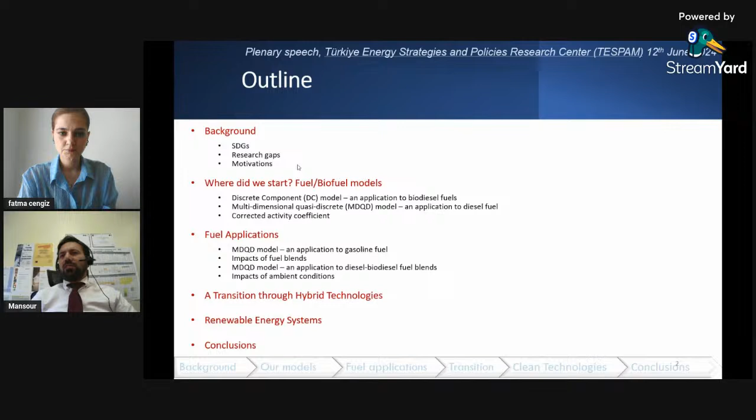To start, as we all know, there are 17 SDGs proposed by the UN, and everyone in the world needs to shift towards that, sooner or later. This is a critical matter, demanding and affecting all researchers, industrialists, and academics equally. The relevance of this talk will be to SDGs 4, 6, 7, 9, 11, and 13. I won't recall them all, but they are highlighted in this slide.

More relevance will be to SDG 7, which talks about affordable and clean energy. This was summarized by the Assembly in 2015, that energy needs to be affordable, reliable, and sustainable for all humans on the globe. To understand what it means, we can look at two important factors that can improve our energy efficiency: the sources of renewable energy in general - are these sources depleting, are they clean, are they sustainable - and storage, meaning how this energy can be stored. These are the two important questions to answer.

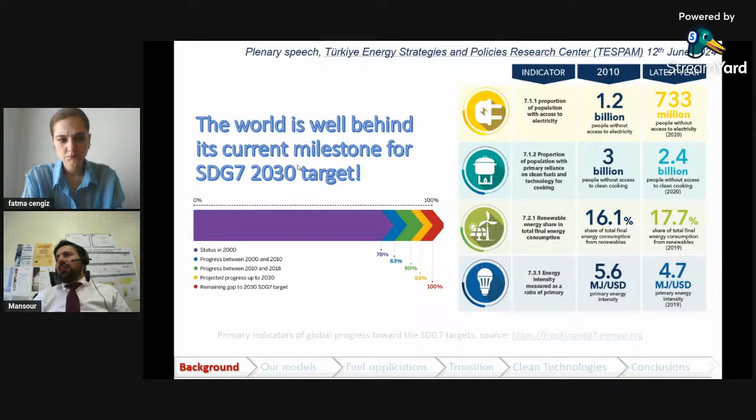There are many reasons behind it, such as where the world was in 2000, how it moved, how that evolved, and where we stand now. Up to last year or a couple of years ago, the figures show we are still well behind. Many countries in the world are trying to move towards the SDG regulations and guidance, but as we can see from the figures, we are nowhere near the targets, and we need to speed up the work.

To talk about that, I need to start from my story, where I started. I began working in the area of thermofluids in 2007 at Sussex University's Thermofluids Mechanics Research Center, which is a Rolls-Royce University Technology Center. After that, I moved to Sir Harry Ricardo Lab at the University of Brighton in 2012, in the southern part of the UK, and collaborated with the Ricardo company at that time. Ever since, my research has kept evolving in this area.

The motivation was that at that time there were calls from environmentalists, government bodies, and industrialists for a replacement of fuel with bioenergy. There are many reasons behind it - economic reasons, environmental reasons, policy makers behind it. So there are a variety of factors.

For example, the UK Department for Transport was contacting our research center at that time, asking us to feed research into this area as well. So it was a critical matter.

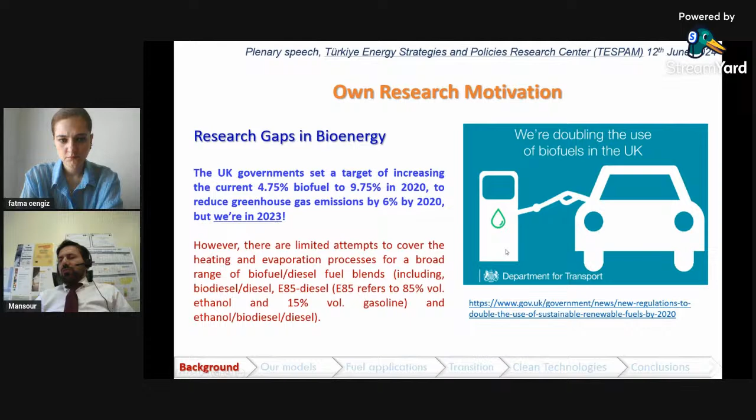When I started working in this area, we found many gaps in research. Because I was working on the computational development part, I found that CFD software tools did not take into account the full physics and chemistry underlying the processes preceding the onset of combustion. For example, temperature gradients inside droplets were not taken into account, and species diffusion - meaning every single component in the fuel - was not taken into account when they degrade at the surface of the droplet and inside the droplet.

Many of you will question why this is important. I can show you the results of that later in this presentation, as well as the recirculation - the first thinking about this started in 1989, considering recirculation in droplets and how important that is on many aspects of combustion, as well as non-combustion processes that have atomization and sprays in them.

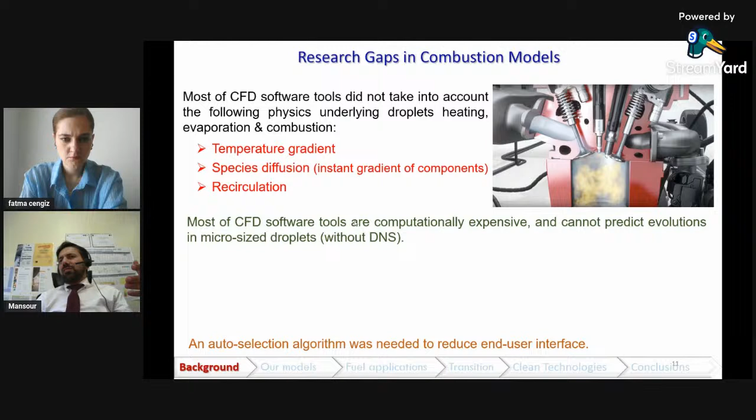And adding to that, CFD software tools at that time, about 16 years ago, were computationally expensive. It wasn't easy to deal with complex methods, and especially if we want to do DNS, direct numerical simulation, it becomes even more complicated and more timely work, which is computationally expensive work to do.

And when we looked through literature, there weren't sufficient attempts to look into that. There were many fuel surrogates, which are either research surrogates, such as research octane number, or there were some experimental attempts, and they didn't take into account the underlying physics. So they can be applicable in certain scenarios, and when you extend the range of application or the real full cycle simulation of the engine, then these surrogates fail to meet the demand.

As a result, at that time, we came out with the idea of the multidimensional quasi-discrete model, and that was based on a model proposed by Professor Sazhin in 2006. He's a leading mathematician. He was at Sheffield University and moved to Brighton at that time, and he proposed the discrete component model.

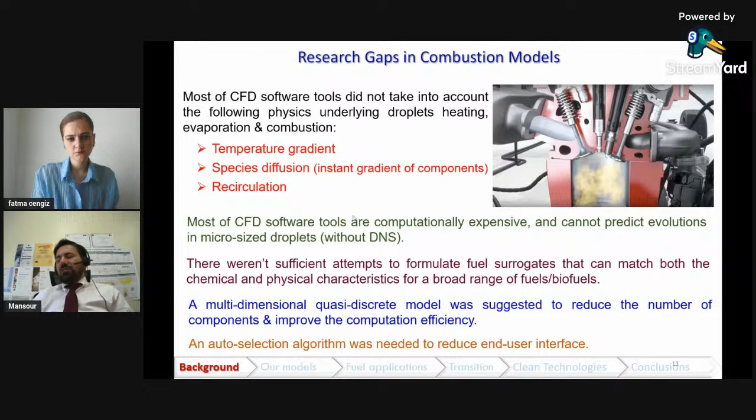And my area was to shift into the multidimensional quasi-discrete model, which means instead of taking one group of components into account, we take many groups, because if we look at diesel, for instance, it has not only alkanes, it has bicycloalkanes, it has tetralines, and many other groups of components. And taking into account these groups of components will make the software tool even more expensive and more timely to run. As a result, we needed to replace them with an auto selection algorithm to select the components that can be represented for the fuel.

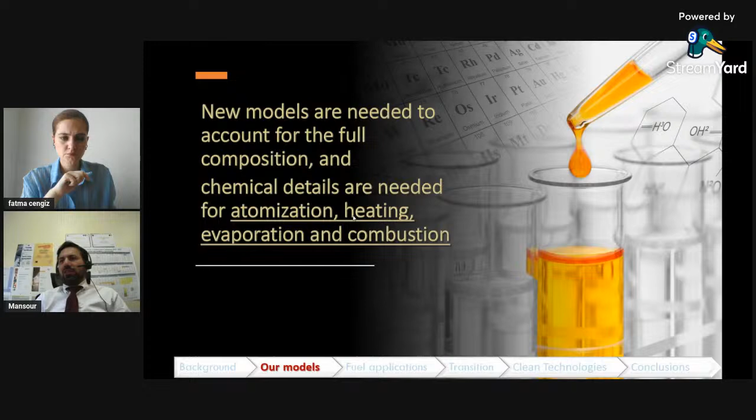As a result, the conclusion was that new models were needed to account for the full composition and to take into account the chemical details for the atomization, heating, evaporation, and combustion. So each part of these processes is quite detailed, and to talk about it in one presentation is unfair. So we will talk at the top surface level of it without mentioning the mathematical modeling behind it. But to refer to where it comes from, I will share some screenshots of the publications in literature that our audience can refer to for further information and enhanced knowledge about the topic.

So starting with the discrete component model. In this, the heat transfer and diffusion of species inside the droplets and monodispersed droplets and the atomization of sprays are all taken into account, as well as not only the thermal conductivity but the effective thermal conductivity and effective diffusivity. And effective means it's not only based on the temperature gradient, but it's based on the diffusion. Because what happens basically, within nanoseconds, not only microseconds, the volatile components, as chemical engineers know, evaporate much quicker than the heavier components.

And within nanoseconds, you find suddenly the fuel composition is different. As a result, the properties of these fuel droplets are completely different. And when the properties are different, the combustion characteristics become completely different. So all of these underlying physics were not fully taken into account in the past. And as a result, this model was very important, and it was crucial for moving forward in the understanding of the combustion model. And luckily, most of these codes that we developed at that time were embedded in many commercial CFD software tools such as ANSYS Fluent. So if you go to ANSYS Fluent, you will find the monodispersed and multi-component droplets function there already embedded.

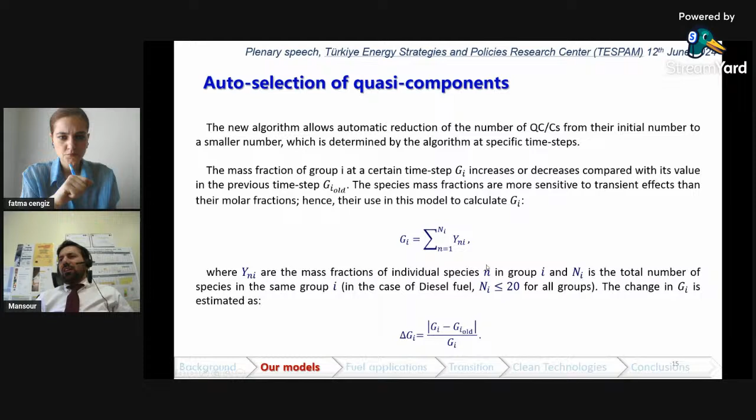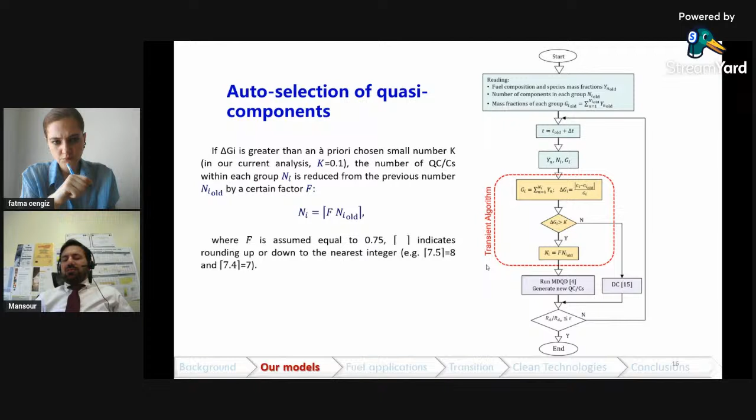As a result, all of these fractions of components are ensured or verified to make sure they meet the requirement. And as a result, the total number of fractions should always be normalized and equal to the total number of components without losing the impact of any of them. And this shows how the auto selection of these components is made to make it easy for the end users to be able to use the code.

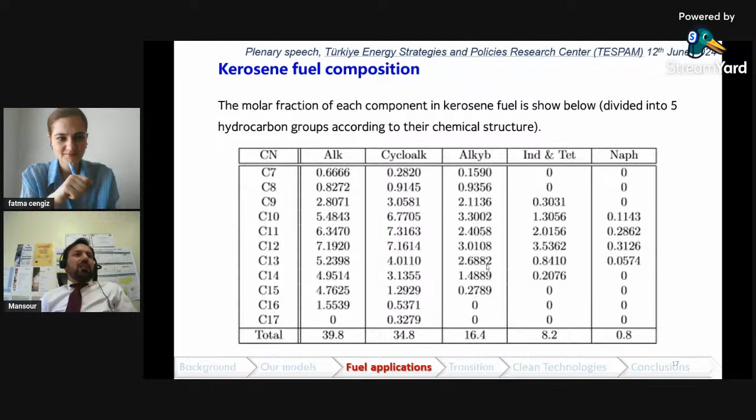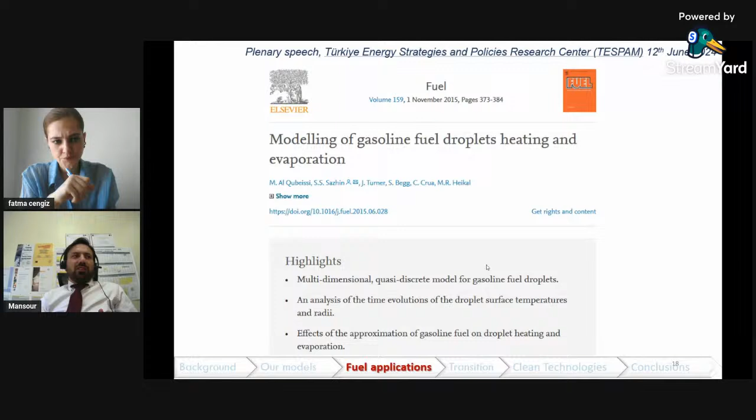So moving forward with that, because talking about all these topics makes the audience bored, we need to talk about more fruitful results on how this can shift further into more applications. So we applied that to gasoline fuel engines, for example, and tried to see the impact of it, and then moved to real diesel engines and tried to understand how the diesel components are taken into account.

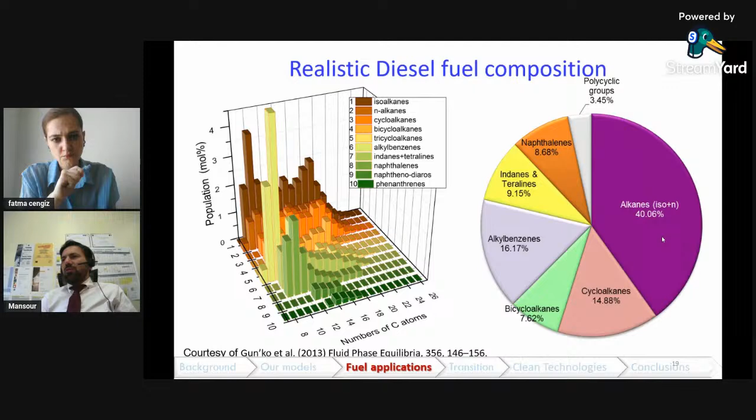Most researchers before that time were assuming that diesels are alkanes. Even in many cases, industrialists were thinking that we could replace diesel with N-heptane or N-dodecane. And that's the impression I had when I started, especially working with Ricardo, which is one of the top testing engine providers. This is the impression the industrialists had at that time. So moving in this direction means bringing a lot of benefits to industry to have a better understanding of how the combustion is taking place.

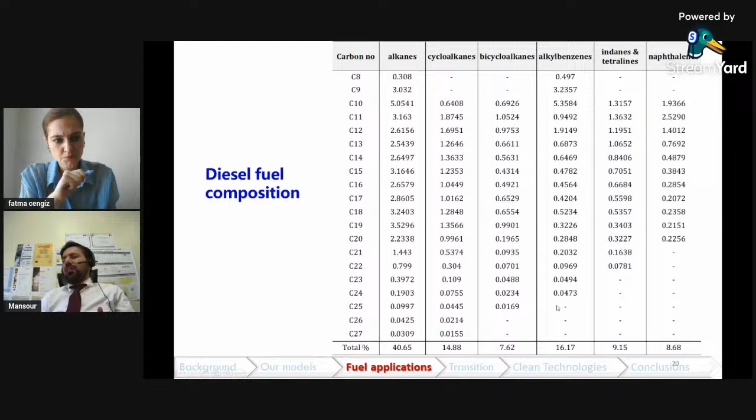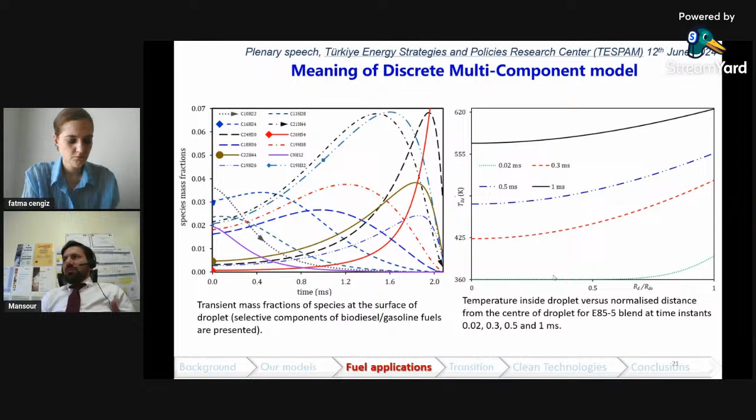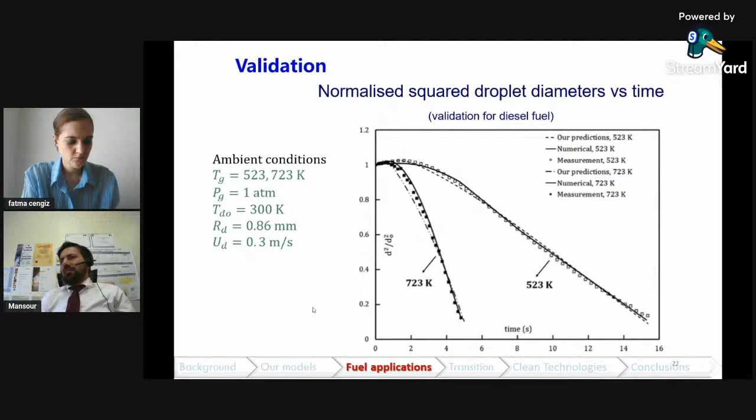In the past, droplets used to be treated as a lumped system because they are extremely small particles. So many scientists used to assume that droplets should be one temperature. There is no point in taking into account the difference in temperature between the center and the surface. But when we looked into it using this model, we realized that there is a big difference, and that could also be due to the differences in species, which affect the thermal conductivity of the droplet. And because the thermal conductivity differs from one layer to another inside the droplet, you could see that it has a significant impact on how the thermodynamic and transport properties behave inside the droplet and at the surface of the droplet at that time. Okay, this model was validated against experimental data at that time for certain input parameters.

And moving forward, we had to formulate surrogates that can be useful for industrialists. And these surrogates need to be realistic, because when we dealt with the quasi components, as I said, these molecular formulas were hypothetical, not realistic. If you show this to any chemist, they will not understand the meaning of these numbers, because as a CFD modeler, to me this makes sense because I look at it from a mathematical point of view. But to chemical engineers, this doesn't mean anything, because these chemical formulas don't exist in real life.

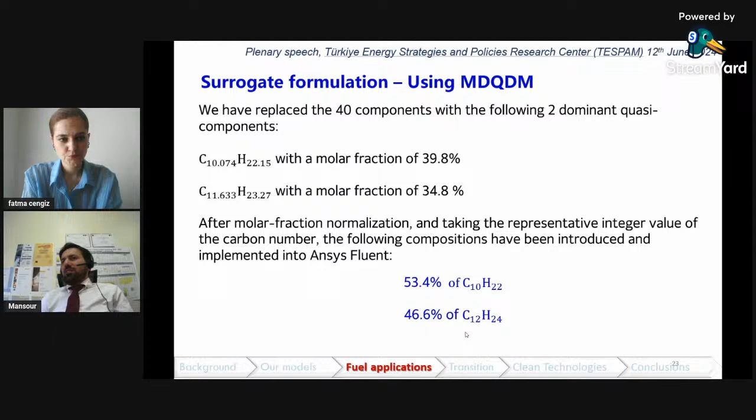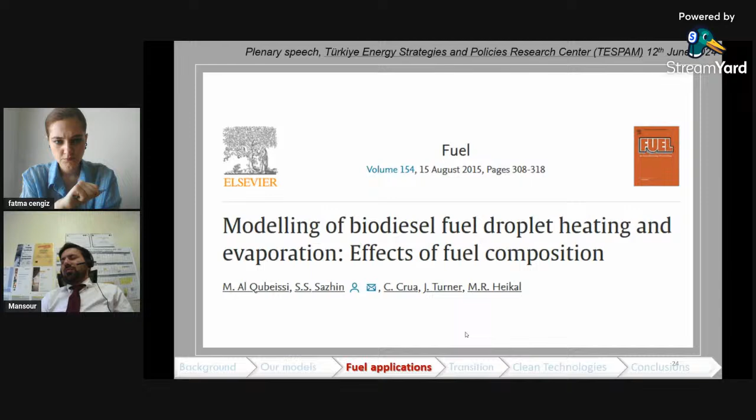So after making sure this is applicable and solvable, we need to make sure they are representative to chemists or chemical engineers, to make sure that this can be used in real life scenarios. And when we talk about fuel surrogates, we need to show the industrialists what type of components can represent these fuels in all scenarios, or the nearest approximation. As a result, we moved forward in application to biodiesel fuel, taking into account all these effects of composition, and this was published.

Then, after dealing with all of that, there was a time to move away from these detailed compositions to something more realistic, which is starting with application to aero engines as well as reciprocating engines. So we started with applying to industrial gas turbine engines, for example, and how that can be realized to make sure the models work.

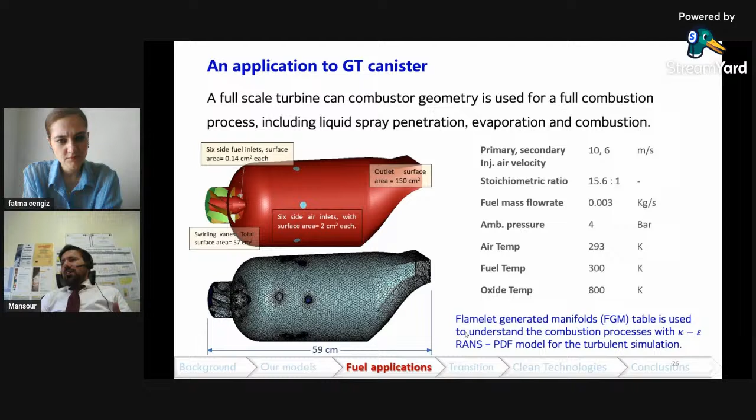And as a result, we started moving into the application to these types of engines and tried to validate that, and also looked at how ANSYS could be improved. ANSYS Fluent, I'm talking about, to take into account all the models, how much we could improve the model. And we could see that at that time, ANSYS didn't have this as a package. Now it has it as a function.

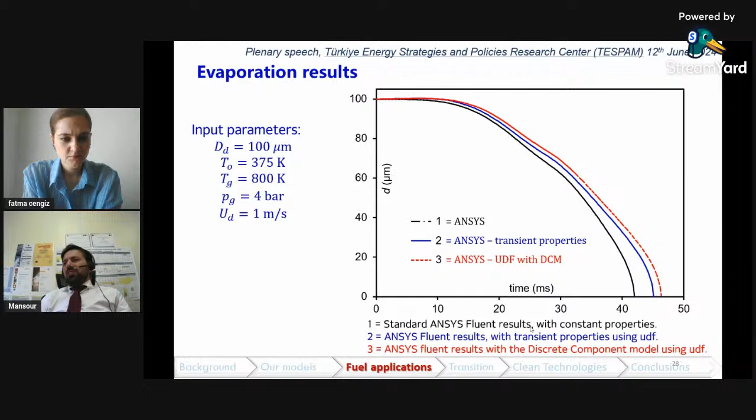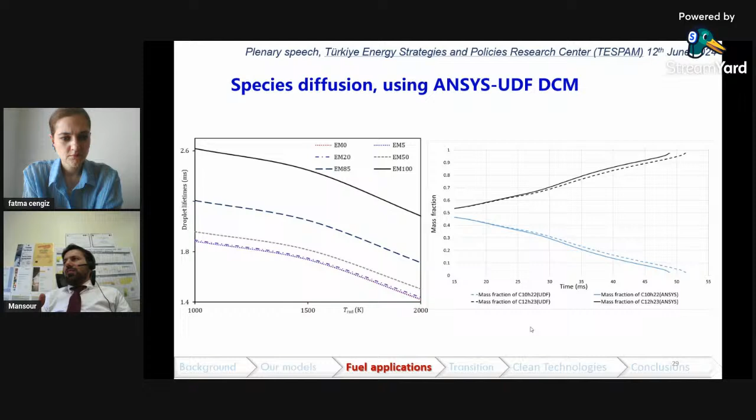We used to use user-defined functions to improve the software and see how far or how close we are to real industrial applications and to experimental validation. And did the same thing by looking into diffusion of species and looking into droplet lifetimes as well, to see how using these models can be impacting the droplet lifetimes, which are the processes preceding the onset of combustion, as well as combustion itself.

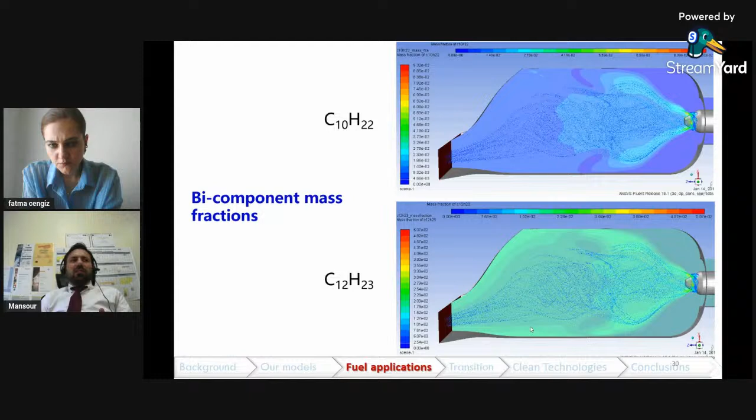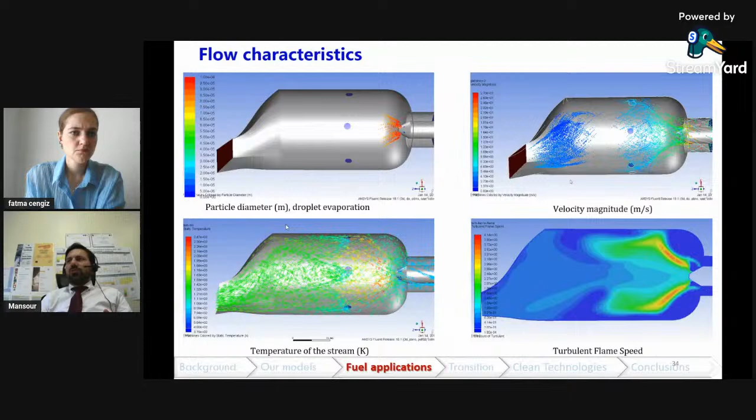So these were the applications and the results that we had. This is a typical example of the results, not everything, of course. And that's how the engine behaved due to using the new model, looking at different sections of the engine to see the distribution of other species such as the emissions, NOx mass fractions, CO2 mass fractions, and O2 mass fractions inside the engine, whether they're homogeneous or not, and compare them to real life scenarios as well, and so on. So that was all carried on research.

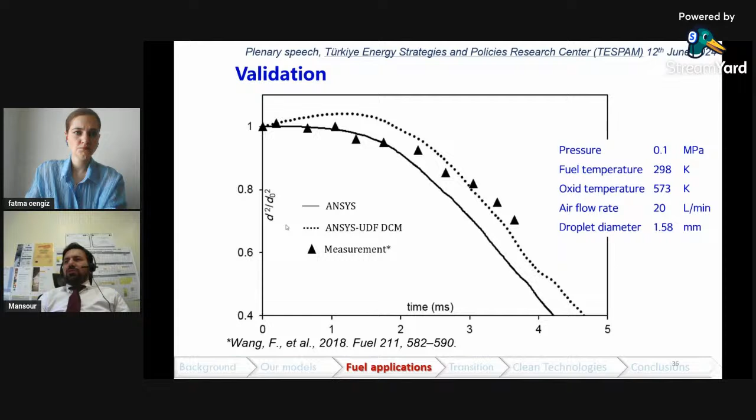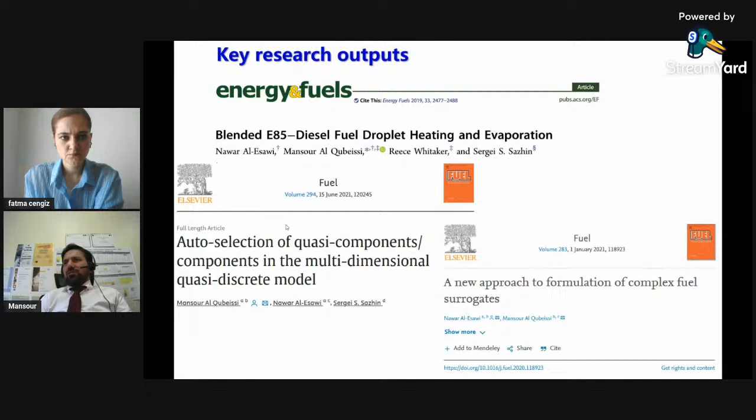And it was also published in one of our papers, joint with researchers from Turkey at that time. And we moved forward into, as well as improving ANSYS, further improving our model to make sure it works properly and it's more precise. And we published further work on the developed model in application to a wider range of combustion systems. All of these were published, a variety of approaches were used, and all shared with the interested readers in a variety of journal articles.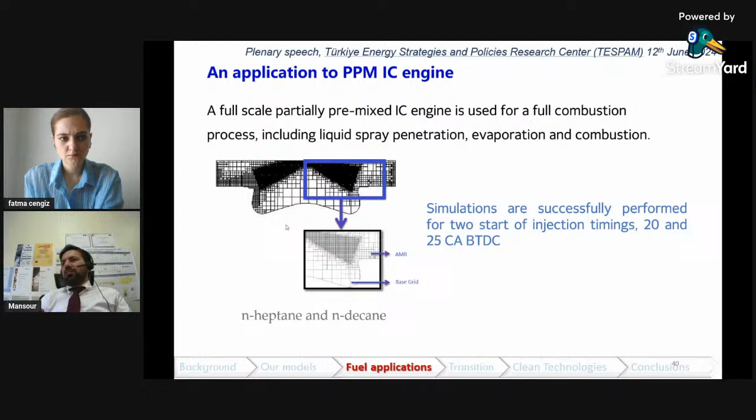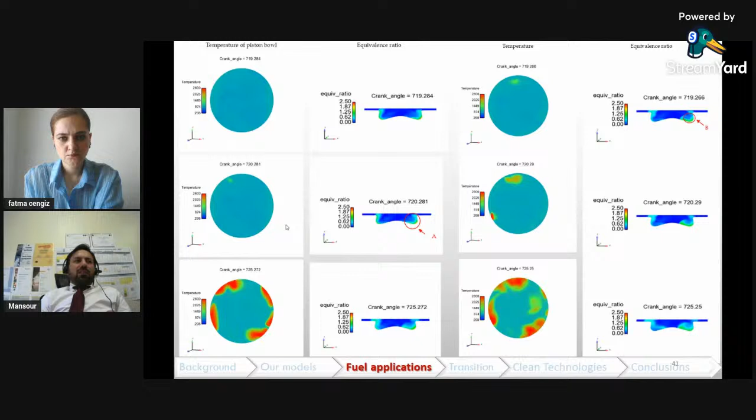And we moved into the improvement of the engine itself, how to improve the pre-mixing process, for example, to make sure the tuning of the engine represents a better quality combustion. So this was a good move, which was enhancing the industry as well as making sure our model is applicable to industry. So all of these applications were strong proofs and evidence that our models are of significant contribution to industry and research at that time.

With all these validations and approximations, as well as improvement to CFD modelers, because here the computational time has been significantly improved, but without a sacrifice of the accuracy of the model. So as we improve the CPU efficiency, we could see that there will be higher errors, exposing the model to higher errors, while here, taking into account the full composition of species is zero error, which is 100% realistic.

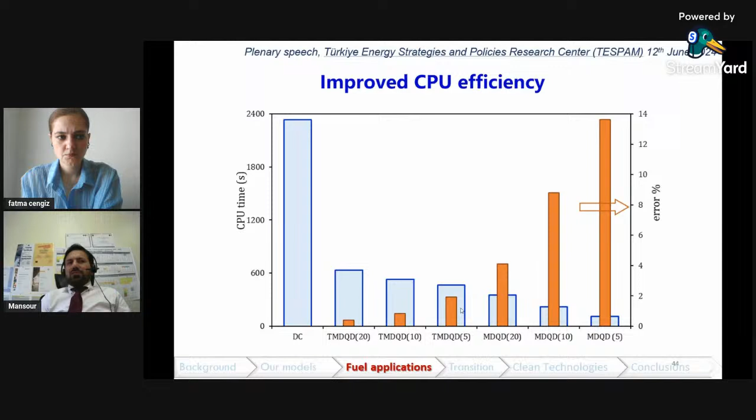As we move forward to reduce the computational time, we of course expose the model to some errors, and we could compromise somewhere in the middle to make sure we have a highly efficient approach without sacrificing the accuracy of these models. All of these were published in one of my papers to summarize how these models evolved and how they were improved, and the improvement or tuning of the engine was also jointly published with many colleagues who work in this area.

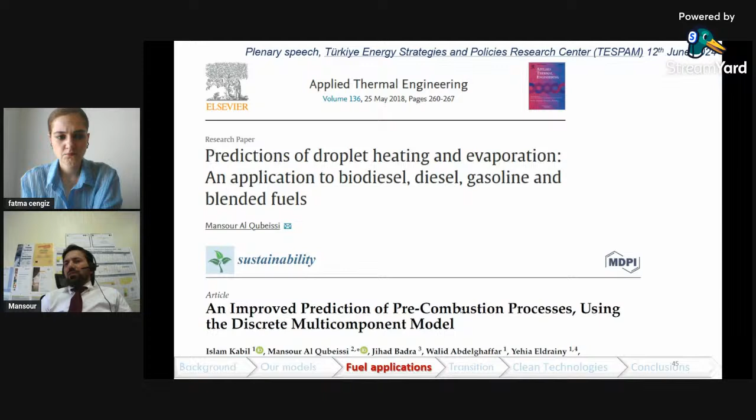I also summarized all of these findings in one of my books in the past about the heating and evaporation of multi-component droplets in application to combustion systems, and how we apply, for example, the variety of biofuels, and what are the challenges and opportunities in this area. And we had a special issue at that time as well, open for researchers to share their findings so we can move forward into a new generation of modeling approaches, a new generation of industrial findings and challenges.

And then at that time, we were told funding resources dried up in the combustion area, and we need to move away in order to attract funding. And they were right, because the classical approach of combustion was to use fossil fuels. And the Western world is struggling with accessing fossil fuels, and the rest of the world will also struggle at some point, sooner or later, because we are getting closer to the depletion of these fuels. So we need to think of alternatives. And these alternatives, as mentioned in the past, need to be sustainable, affordable, clean.

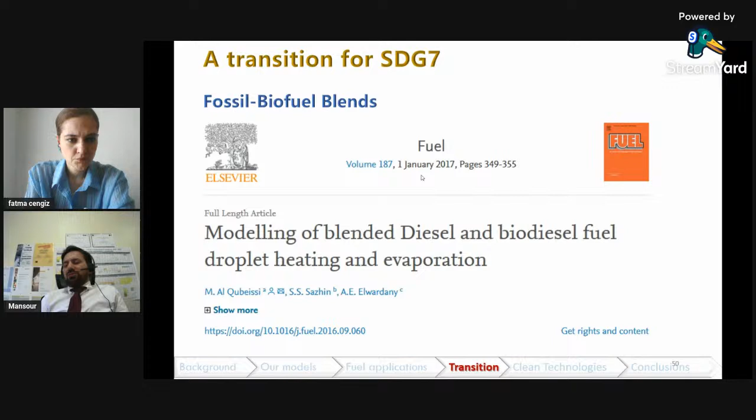Then we had more motivation to move into that direction, which is thinking about the impact of biodiesel on flex fuel. And flex fuel is a fuel that you mix ethanol into diesel or ethanol into gasoline. So ethanol is thought of as a bio replacement of gasoline, and when we have that mixture, you have a problem with the polarity of the fuel.

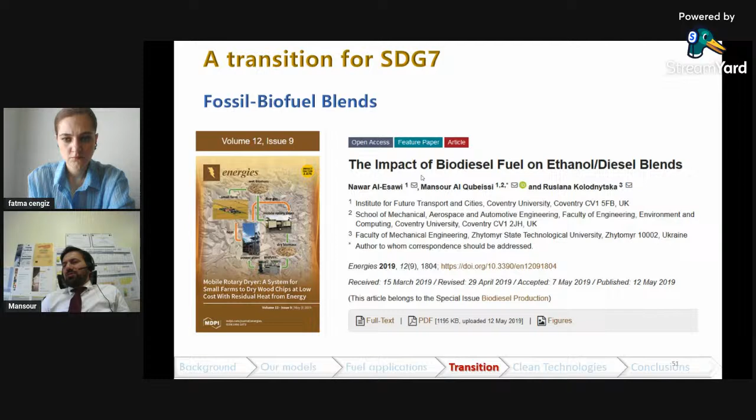So we needed an intermediate solution, and we tried, with another renewable source of fuel, which is biodiesel, to see how this has an impact on it.

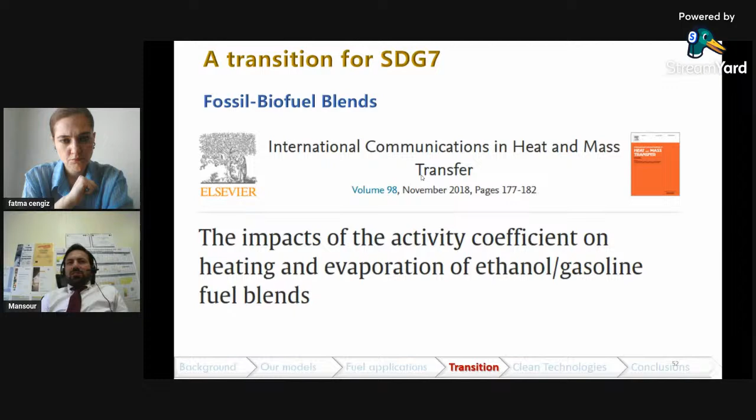So at that point, we started thinking more seriously about transition to SDG 7, and we thought about other details in the model that can make improvement to this mixture, such as the activity coefficient. And as a result, although these thermodynamic properties might not be thought of seriously, they have serious impacts on how these fuels behave and how we can resolve this matter. So all of this was shared with the public through our research articles and publications.

And after that, we need to cope with the game-changing proposals, especially by politicians and many academics and media, that electric vehicles are coming and people are shifting towards that. So are we really ready to move to electrified, or what they claim to be clean technologies? Are they really clean?

My opinion is not important here, because there could be many conflicting or contradictory opinions regarding this matter, especially for me coming from what is described as the dirty combustion area. They're using fossil fuel, moving to electric. Maybe there is rejection by the combustion society to think about this as a good approach.

So what we need is to have a clear transition in between. So maybe thinking about hybrid electric vehicles as one way in the transition. As a result, we started thinking of how we can use existing technologies in improving emerging technologies such as electrified vehicles.

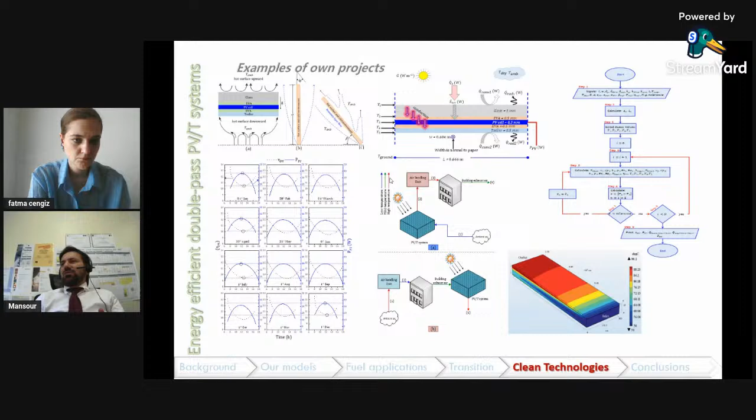Now moving into a wider range of battery thermal management using a variety of types of fuels, and also applications to a variety of renewable and sustainable energy systems, moving into the details of how batteries work and whether they can be used in other types of applications or energy resources within the grid, and moving into even wider applications beyond conventional energy systems, such as vortex tube generators, and hydro-powered systems to generate energy or extract energy from moving water, which is hydro pumped.

An example of this shown here is the hydro-powered Bunyip pump. The Bunyip is a multi-stage pump that uses two sides: one side to make a reciprocating movement, and the other side to deliver water.

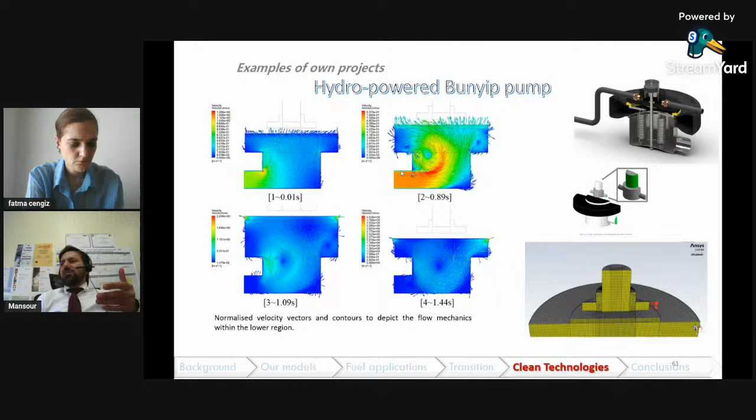This was successful in one of our GCRF projects when we applied it in rural areas in the region of conflict between Pakistan and India, in Kashmir. We applied this type of system to solve a problem where there's no access to electricity, no access to fuel at all.

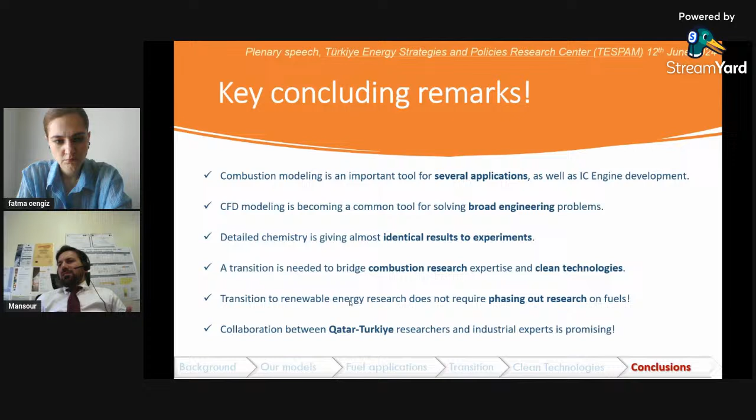As a result, this talk is a call for joint collaborations between researchers from different disciplines, to feed our knowledge together into useful impacts in the future. Examples of collaboration with many researchers, especially from Turkey, have in the past been very successful and promising.

As a result, I would like to conclude my talk at this point, and thank you all for your attention. Thank you.

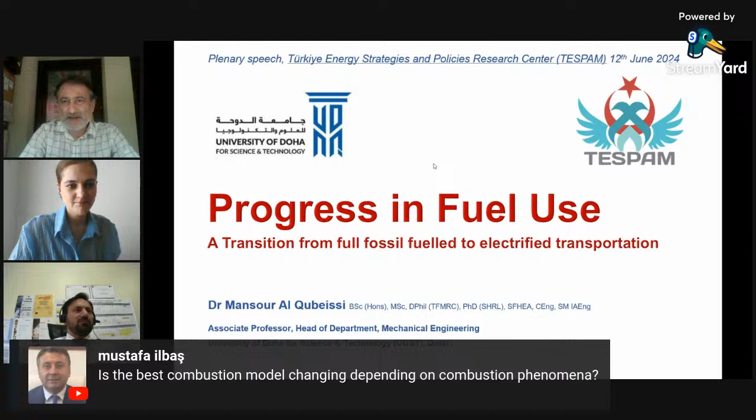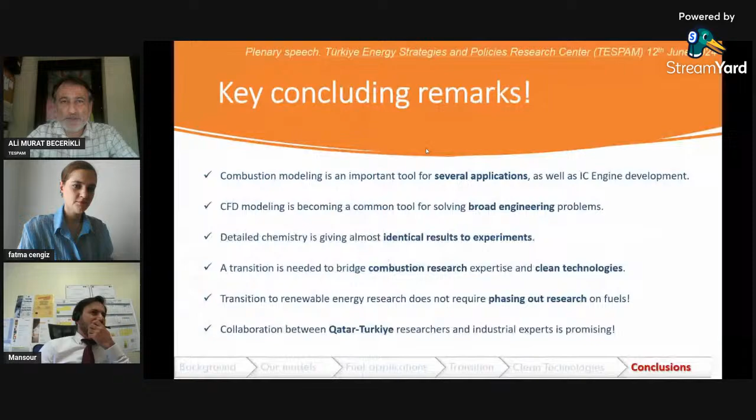Thank you very much, Mr. Al Qubeissi, because this topic is very important. Everyone is talking about the green transition based on electrical vehicles, but you also warn us about what will happen to the existing factories and existing combustion technologies in the future. Your studies showed us that there are alternative models, especially the ethanol mixture and biodiesel alternatives, to overcome CO2 mitigation problems regarding international intergovernmental agreements in this area. First of all, what is your opinion on the biodiesel issues? As you mentioned in your presentation, biodiesel does not reflect enough cleaning on the pollution based on nitrogen, as I understand.

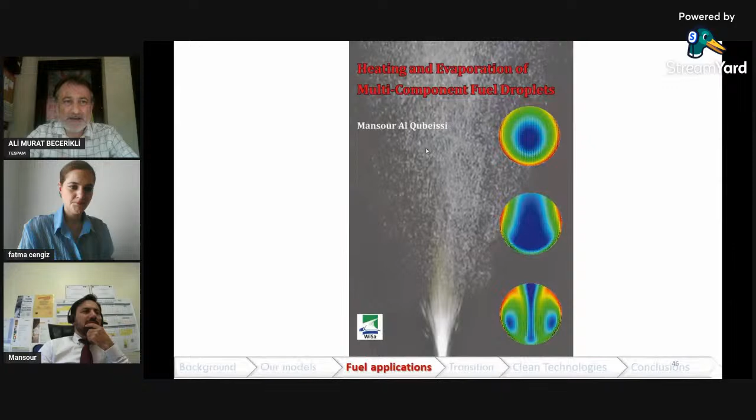Am I right? Because the European Council has a limitation on NOx emissions. That's why in recent years diesel engine production is limited in the European Union, so that for the latest decisions of the United Nations, they will follow the European Union's criteria on climate change constraints. The European Union studies will be like a desk that they will follow, so that the Paris Agreement will be binding on issues regarding the European Union. As a summary, if the European Union regulations spread with the United Nations recommendations, could biodiesel be a solution regarding NOx?

Yes, you are right. NOx is a big factor that can be more damaging in high temperature combustion. It's also an issue when people propose hydrogen combustion. NOx is a big problem. Of course we got rid of CO2, but reducing CO2 doesn't mean better combustion.

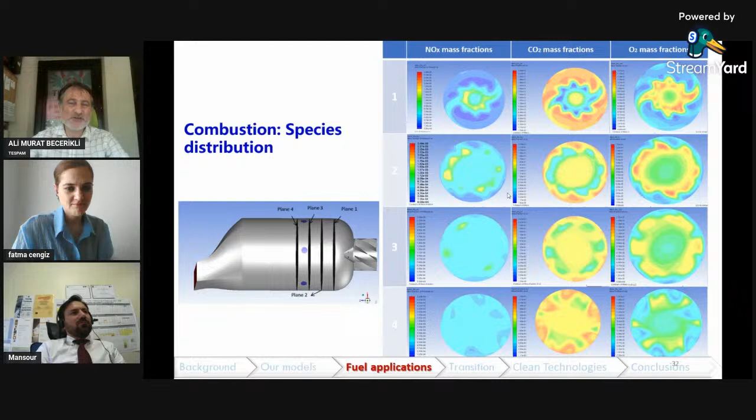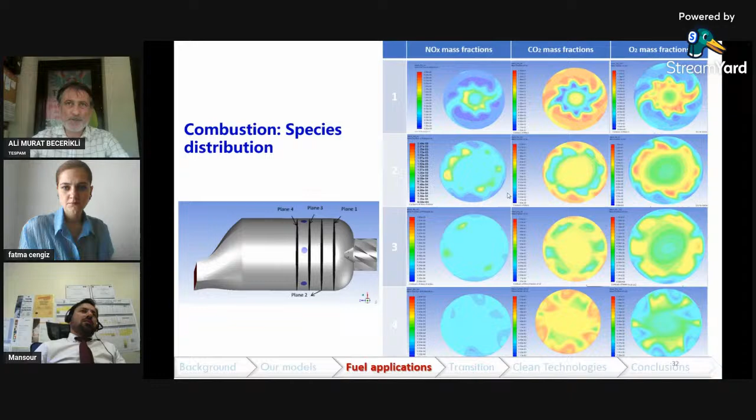So we cannot accept that EVs are the absolute solution. The other combustion alternatives are on the basket as well, to be compared and discussed. Some of them have different positive sides, but some have negatives at the same time.

The idea of all this is that, like we said at the beginning, this energy needs to be clean, sustainable, and affordable. So the current technologies in the market don't meet all of these.

Some of the technologies are made for rich people, if we want to be honest about it - not made for us or the audience in this room. Maybe there are some rich people in the audience, but I don't believe rich people would care about what science looks like. They just care about the outputs, or the definite numbers at the end. So as a result, if we want to provide solutions for people who care, or we care about, we need to be realistic about these solutions.

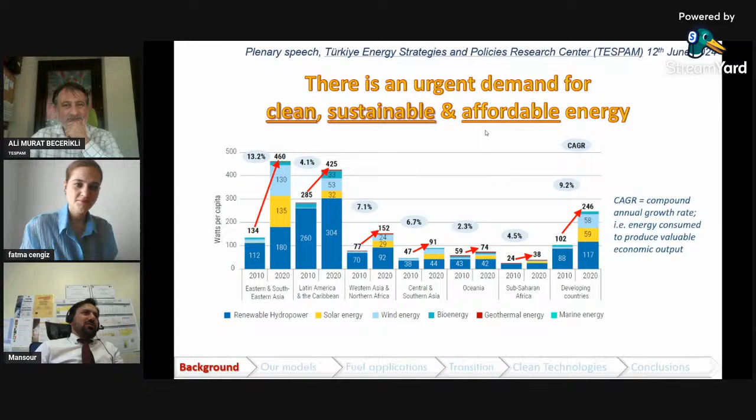Are we caring? I remember one of the people approached me from a big company about 5-6 years ago - I don't want to mention the name due to conflict of interest. They asked me to do research about droplets for the handle of one of these luxury cars, because the handle was accumulating droplets in winter, and these rich people don't want to catch the handle when it's got droplets. They want it to be dry.

And they were willing to pay a lot. So that tells you that research doesn't always is honest, and we have to debate all opinions, because I don't always trust what I see in literature or what is proposed by researchers or politicians. We need to work together to collaborate and correct each other when we do work.

So are we really, when we propose ideas, talking about all of these? Are we, when we shift from fossil fuel or conventional combustion approaches to new approaches such as electric vehicles, meeting the demand for the public? How many people can buy electric vehicles, and how long will these survive? Can they survive as long as the conventional engines?

Let's think about it more realistically. Are we really moving into helping rich people to be richer by buying these electric vehicles, or are we really trying to solve real challenges that the public are facing? Fundamental people who work in research, most of them can't even afford to buy cars. So why are we thinking about moving into making a big shift without solving real problems?

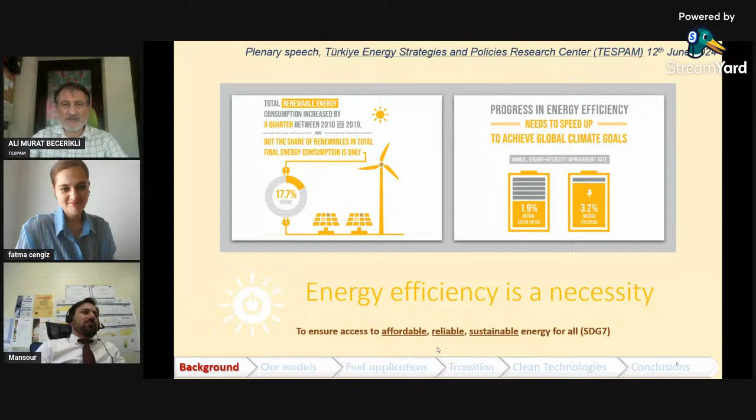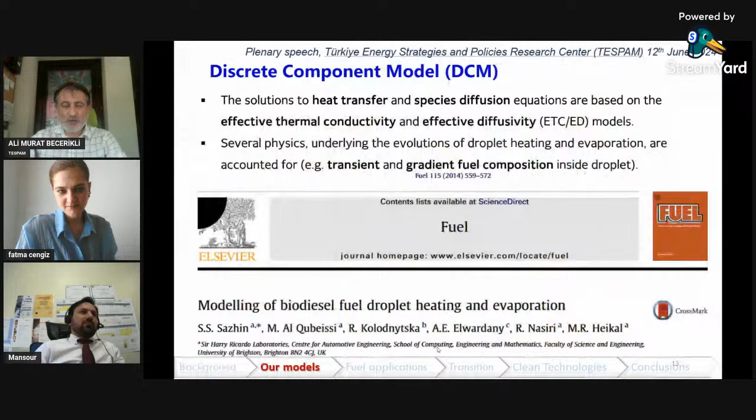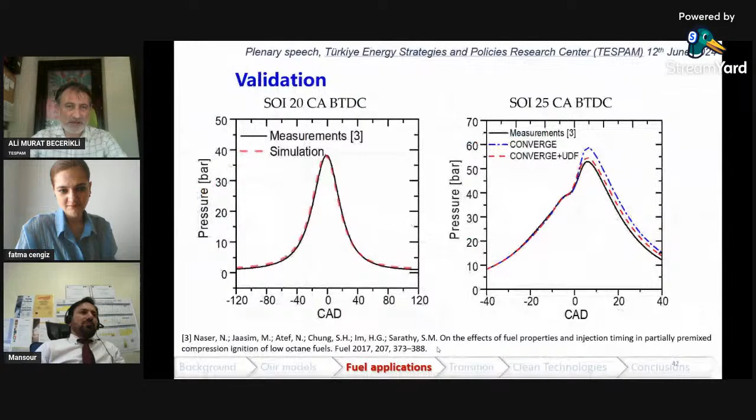Maybe in your presentation, I also once more reiterate the coolant as a fuel you have studied, the other side of the droplets, the modern high pressure droplets for efficient combustion. So the hybrid systems may be more efficient in using the power on the combustion and both on the electrical vehicles. Maybe the hybrids will be in the table.

I totally agree. If we want to satisfy both parties, then we could talk about hybrid electric vehicles. What I understand from all your presentation, the hybrid solutions may be the best solution.

It's the best for people like me who worked in combustion for a long time, because there are many people who worked in combustion, like Dr. Professor Ilbash, his main area was combustion, and even Dr. Soyhan, he's from Sakarya University, this is his area. So to ask them to do work on electric vehicles, they might think this is a waste of long-term experience they have in combustion, where they think combustion is much more complicated field of science.

And it's also to ask people to dump all that experience and move to electric vehicles is probably harsh, and is not so much beneficial, maybe, if you look at it from long term. So maybe the marriage or the transition between these two ideas is to think about how to use fuel in this modern technology of electrified vehicles.

And one way, I'm not saying this is the only way, this is one way, is I was thinking of using fuel to manage the batteries, because thermal management in these electric vehicles is one of the most important things battery manufacturers think about. I went to one of the biggest battery manufacturing in the UK.

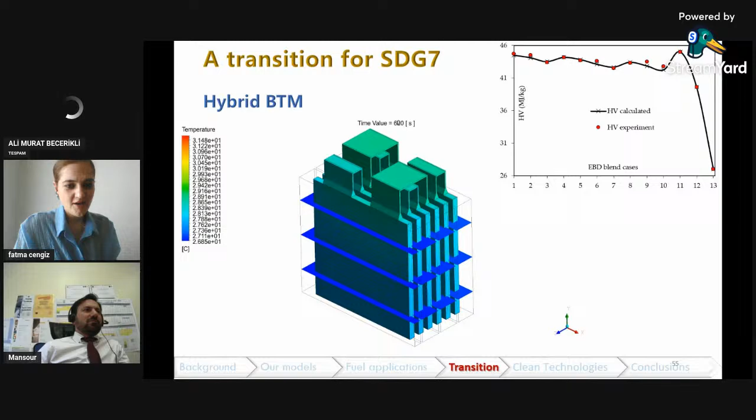I think also Sir Becerikli also have a net issue. You can continue your answer, Dr. Mansour.

Yeah, I think that's what I feel is the answer to Dr. Ali. So is to have a transition in between different ideas and to try to collaborate in that manner, rather than dumping someone's idea and thinking that a new idea is better.

Thank you so much for your answer.

Okay, thank you very much, Mr. Mansour. Thank you, you informed us and take into attention the combustion engines once more, that this is not the end with the EVs. So the combustion engines will be in the life in the future as well. Yes, certainly, so we would like to give this message, and what can be done in the combustion engines. You give us several ideas. So the technology is going on with the combustion technologies on the other hand.